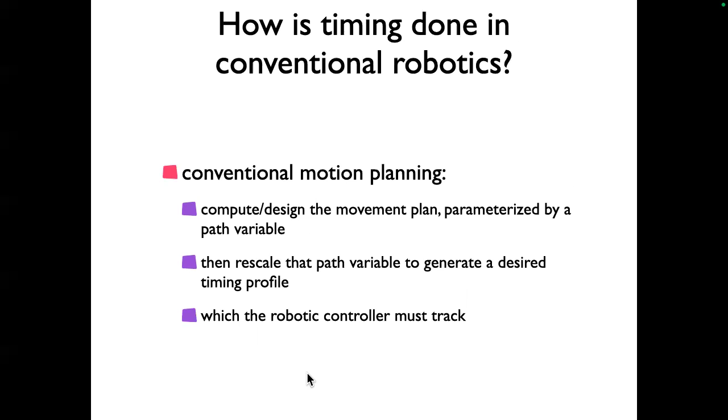And this is in the textbooks I recommended. The pictures are from this book, which I recommend. It's also on the exercise sheet. And there's an online version of this, as you might have noticed. It's chapter 9, if you look that up. So again, I just do that very briefly because it's not really something we go into in depth.

So the first thing you have to decide is in which space you do the planning. Remember, we talked about configuration space. There are mathematically equivalent representations of that. You can use the joint space, for instance, or you can use the end effector space in a non-redundant articulator. Those are equivalent. Sometimes we say articulator, equivalent to manipulator, equivalent to robot arm. The speech articulators are an example of that.

So if you do this different planning, then the kind of interpolations you do when you generate a time course from start to end will look different. For instance, you could have a straight line in joint space, which then leads to a curved path of the hand in space, or you want a straight path of the hand in space, and then it's curved in joint space. And a straight line is easier to interpolate and write down as a function in the planning code, so you might choose which one you do.

Humans actually tend to move their hand on relatively straight paths in 3D. And so it's more, whatever that means, right? But that's what they do, and we'll come back to that.

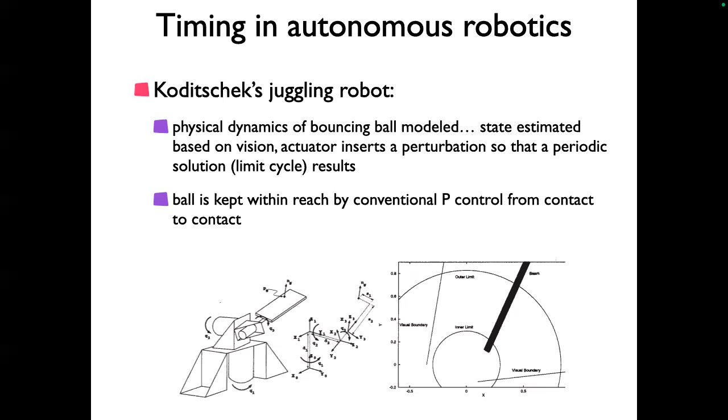The limit cycle is a nonlinear dynamic solution, an attractor solution that's periodic. That wasn't common at all. People just think of harmonic oscillators that end up at a fixed point, being at rest. Quite innovative, and it became famous through the Raibert school. This guy, Marc Raibert, was at MIT. He founded Boston Dynamics and is still running that. He was originally an MIT professor.

He had a famous hopping robot. So it's a robot sort of analogous to the paddle. It's just the robot itself that jumps. The robot had just one leg, a one-legged hopper. It was a passive spring that did the actual interaction, and then you would always insert a bit of momentum so that it jumps up. And again, the control of the robot in the plane would be done by changing the angle at which this leg hits the ground, with a P controller, to keep it in vertical bounds.

And the main thing is to keep that rhythm. Again, you have the model of the robot as a falling object, and that makes a certain trajectory. And now you're writing down the equation of the falling body, but you insert another term in that equation, which makes a limit cycle. And that term is what you're going to actuate. So you make sure that the robot delivers that term to the equation.

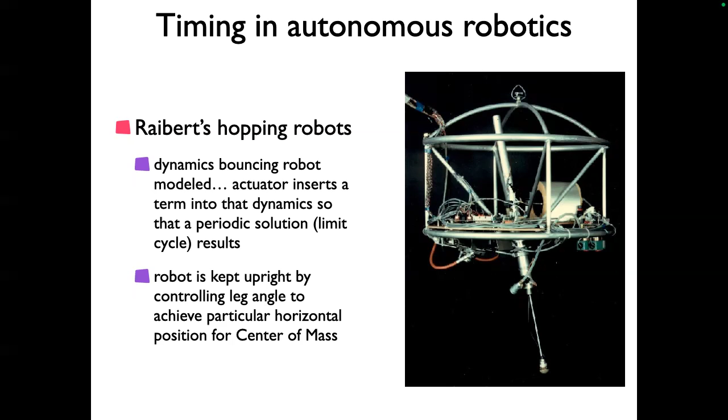It's only approximately true, but because you design it to be a limit cycle, even if you're not exactly on that solution, you're going to be close to that solution. The same kind of idea. Again, you don't have to understand that fully, but maybe you get an intuition for that. And so they have done this.

So Koditschek actually has some general discourse about that. I think I'll skip that because it's a little bit too abstract. It's a very interesting thing where you don't have to think about the details. You can just think about sort of a macro state. But I think that leads a bit too far for this lecture.

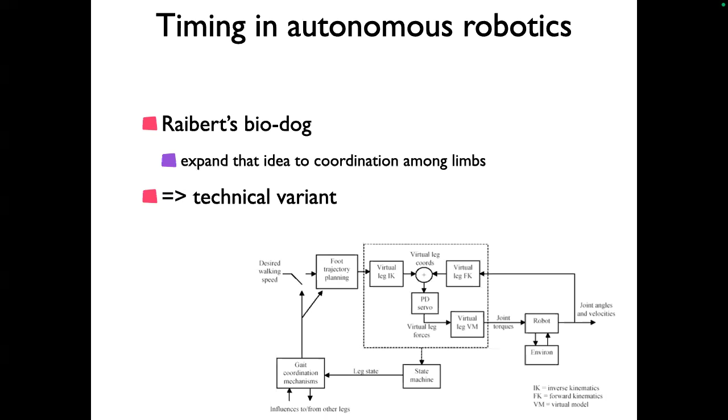I'm just saying here that there is more than just that idea, right? You have to do a lot of things right to get that right. The leg has to sense that now it's engaged and has to insert some momentum to actually hop and so on. And so here I wanted to show you this video.

I hope this works now. I have to move this over here. Oh, we have this. Sorry.

We know these things, right? This is a video from Boston Dynamics. They have all these kinds of robots, and they're much more complex than that. But the core idea of how these individual legs make their motion is a limit cycle, a limit cycle that is just sort of keeping a rhythm.

And it is now reacting—can you imagine the mistreatment of robots. So here, for instance, the legs encounter terrain, and so they don't actually extend as much as planned, and then the limit cycle just adjusts to that, and we'll just try to keep something optimal.

They also coordinate that, making sure that the different oscillators stay on a certain phase, like coupling them. The robot doesn't have a model of the environment, doesn't have a plan—it's just reactive to what happens to the individual legs.

The steering, by the way, is not automatic—it's someone with a joystick directing the robot in different directions. There are many variants of this from the company, but not for that.

Now, for instance, it's like making that periodic motion, and that periodic motion can update every time it is mechanically prevented from actually achieving what it's supposed to achieve. Okay.

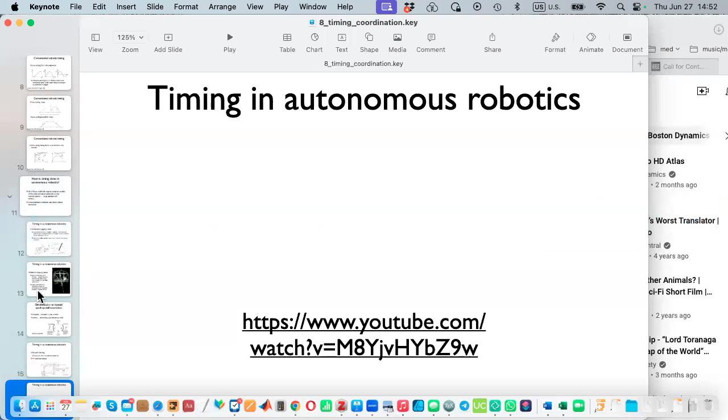There's lots of videos like that on the internet, you can easily look at that. So that's one line of thought here.

To finish that thought: this was all done because in autonomous robotics you don't know everything, so you can't just plan a perfect time course to go to certain places. You have to do it on the fly, solving the problem of a dynamic environment—the environment changing, even perhaps just because your plan wasn't perfect, so the deviation from the plan is like a change in the environment. It wasn't actually necessarily a change; the plan just wasn't perfect. But it also gives you for free the ability to deal with a changing environment.

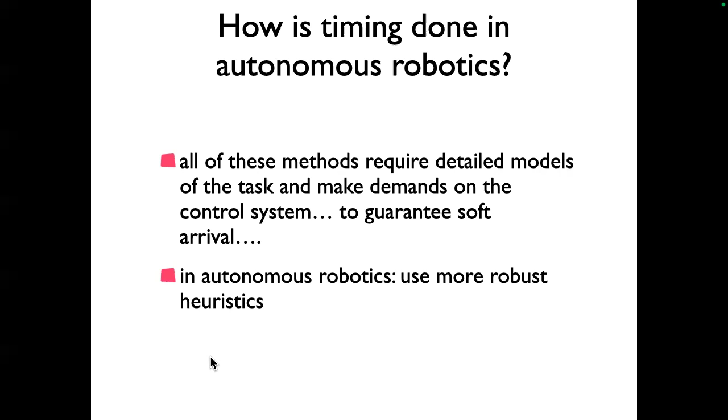So it's much more demanding, but also much more performant. This is not done at all in industrial robotics—they just repeat their movement, and if it's off, it's off. It will destroy a lot of stuff before some observer turns off the robot arm and corrects the error. So it's fundamentally different in these autonomous machines.

Others could lecture a whole course about this, and it's boring in the sense that you have to figure out the details and the different approaches, each with their advantages and disadvantages. But conceptually, it's just that.

So what I instead want to do is throw out a few concepts that can be used to think about such things. These engineers are actually, in part, inspired by or interact with and use concepts like that. And these concepts come from human or animal movement—mostly human movement.

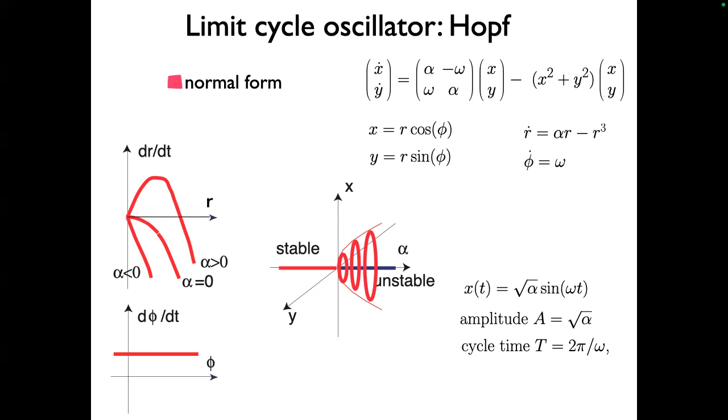They are not harmonic type oscillators - they're what we call relaxation oscillators. That is, there are fixed points that are almost stable; you're going toward the fixed point, but when you get close, you find it's not stable, then you go to another fixed point and so on. I don't want to explain that in detail - there's actually a simulator for that online, but I don't want to go there.

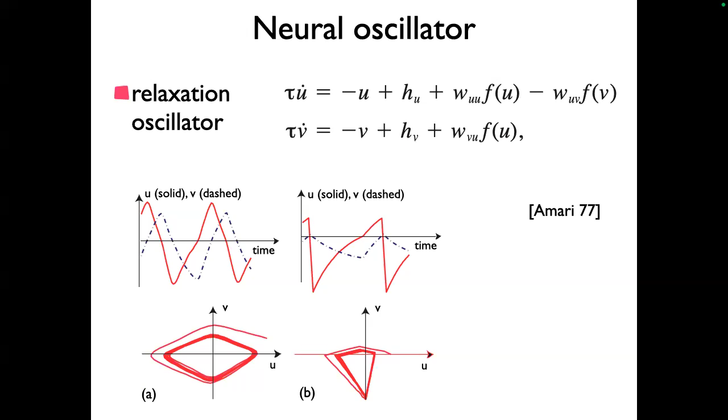So these kinds of models can actually account for some of this observed stuff. For instance, in those models, the variability of the cycle time increases with the cycle time, just naturally, off the bat. In a sense, in any limit cycle there's an unstable direction - it's actually a marginally stable direction where you have Brownian motion, that's along the limit cycle.

So if noise puts you a little further along, you just keep going - you don't go back to the old time, you just keep going further. That noise shifts you along the limit cycle. Imagine if you have a longer, slower movement, you have more opportunity for such perturbations, and that creates this increase in variance. The longer the movement, it's essentially Brownian motion - for those who know that diffusion law, Brownian motion, Einstein, that kind of story.

So that's absolute timing. And these oscillators that autonomous roboticists use are inspired by that idea — you need some oscillator that you're driving the system with. And because it's a stable oscillator, you don't have to precisely plan everything. If you're a little bit off, next cycle you'll be closer.

Now they're also using the idea of coordination, and human movement tends to be coordinated. So locomotion, we're clearly alternating — we're bipedal, so for us you could do hopping or alternation, but there's a real constraint on not falling over. If you're a quadruped it's already a bit more flexible, and there's subtle stuff where dogs will make an extra step with one leg, called relative coordination. Centipedes and so on — it's always been studied.

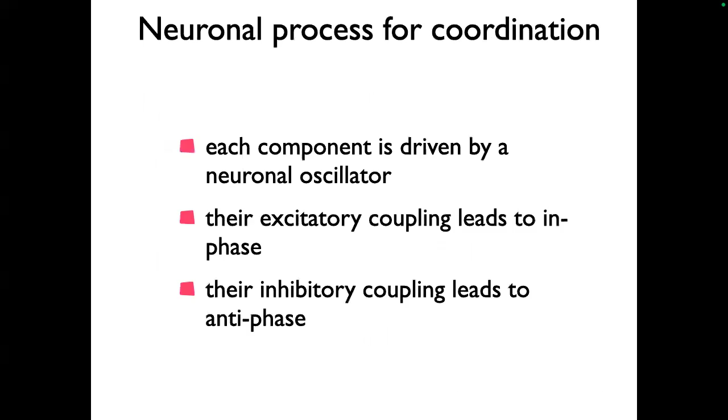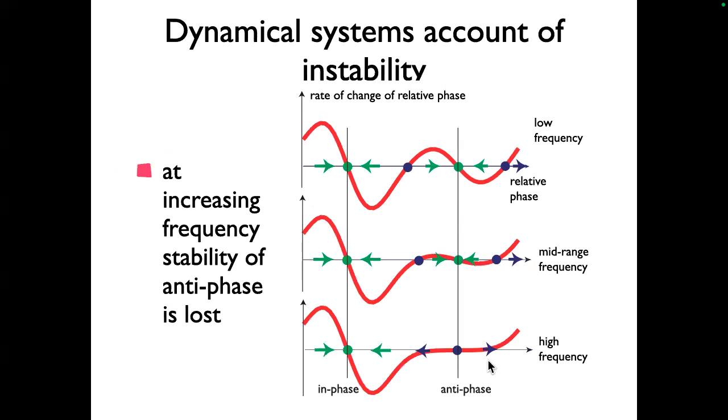So if you do a model, I'll just say that here, a model where there is some attractor at in phase, this is phase, and that will be in phase, that will be antiphase. And if the attractor becomes unstable, so the slope goes to 0 until this becomes a repeller, right? You would be familiar with that kind of bifurcation. Then the stability is predicted to be lost. So the slope becomes flatter, less stable. And you predict that the variance then increases.

This is something we didn't really study. You can get intuition why that's the case. If you have a steep dynamics, you have this amount of noise, then it would shift the dynamics up and down, and the fixed point would be moving within the small range, and that's where you would be driven. If you have a flatter dynamics, you have this same amount of noise, the attractor now moves a lot more. So it's a bit more complicated because also the slope is different, so you may not be moving as fast to the attractor, but overall it works out that way. That's why you're predicting that the variance increases with frequency.

And similar for relaxation time, you're predicting the relaxation time directly is, remember, this exponential minus alpha t, that alpha is 1 over the slope. So these are predicted from these kind of models. So that's why this was very exciting. So that really means that antiphase, it's not a question of not having the neurons to do antiphase. It's a question of they are outside the stable regime. So you won't see it because of that.

So that was actually quite influential, why this paper is still cited sometimes. Because you can say, that means timing, relative timing requires stability properties, now not of a heading direction, but of something like relative phase. And it's coupled oscillators that do that. So if you take oscillators, this is an example of the neural oscillators, and you couple them, which just means that one shows up in the equation of the other. So for instance, here oscillator number 2 shows up in the equation for number 1, and oscillator number 1 in the equation for number 2.

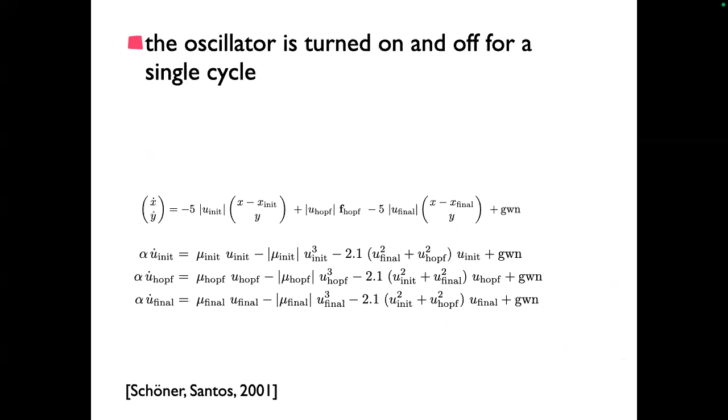So we actually built a demonstration of this in intercepting balls. So we made an oscillator that would be just doing one cycle. It wouldn't do a periodic movement, just one cycle. It's based on taking an oscillator, a Hopf oscillator, and turning it on and off just right, so that it only does one cycle. And then after that cycle, it would go to a fixed point. And by doing that, we can then synchronize it with some sensory information about a ball. It would intercept the ball. And explain all the equations.

So there's an example where there would be a signal that starts the oscillator, and the oscillator moves just on a single cycle, right? It does look like a periodic motion, but it's a single cycle of periodic motion, because when the movement has ended, we're turning off the oscillator. And we were able to show that it can take a ball and even have sensory information about the ball, but it would just make one movement for intercepting the ball and then moving back, and it's stable in some way.

And we actually demonstrated that on a vehicle. So this would be an example of a vehicle that does do that timing. So the vehicle is this thing. It has a cable because it's a little mobile robot, and the cable is so that you can use the offboard computer, and it would be moving to a target, and then we would introduce an obstacle. And what we arranged was that even though the obstacle forces it to go a longer way around, we compensated by going faster so that it would arrive at approximately the same time.

Well, fairly complicated dynamics were achieving that. I mean, so this would be an example of timing, using the timing to control relative time. It's of course a toy example, right? It would be like the basketball, baseball guy who arrives in time even though he has to. Actually, I don't think baseball guys encounter obstacles, but yeah.

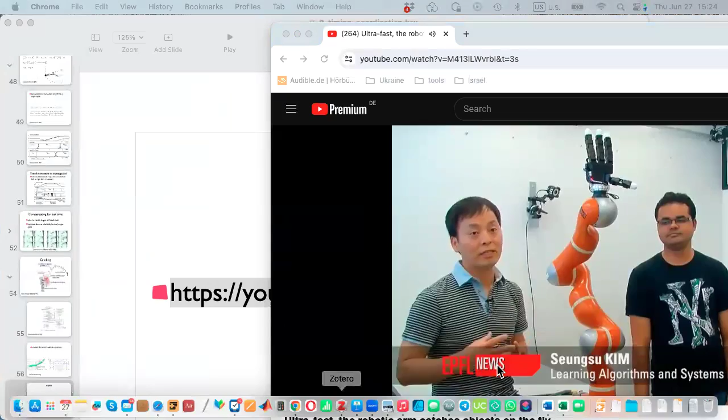We teach a robot how to predict how a moving object moves. After that, we teach a robot where to grasp and how to move each arm. I think the main novelty we bring... We call this programming by demonstration. This robot interacts with human inhabited environments where things can change in a fraction of seconds... you need to have controllers that can adapt.

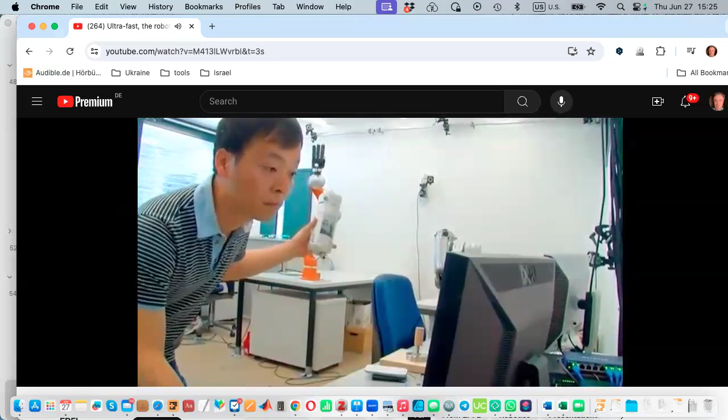Again, they wrote a whole book about it, so it's a little bit more than I can cover in 5 minutes. But the core idea is still that same kind of idea of using an oscillator and coupling it appropriately to sensory information. Okay, almost done.

So this is our version of that, which was about the same time, but much less impressive because the robot wasn't very good. But we just simplified that to just the core problem. So we used a ball here. I'll show you the robot in a moment. So this is what the robot looks like. It's intercepting a ball. And it was also done because the robot was so poor that it couldn't really move fast. It was not easy to control. So we made it slow by making the ball move.

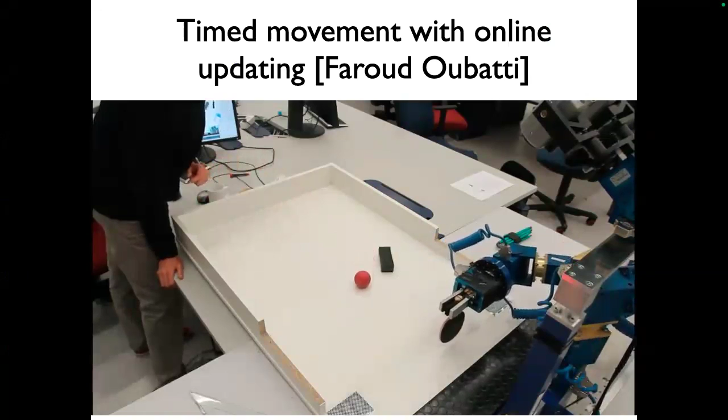So let's first look at what we did there. So we have the ball, and the robot had to intercept it at a certain point with the racket and give it a movement. The movement was sort of one standard movement that would push it up. Again, we couldn't hit it hard because the robot was not easy to control. We couldn't give it a lot of accelerations, so the ball was only mildly pushed up on the slow incline. That made everything slower so that the controller could catch up. And it was literally interesting.

I showed you earlier that inside there was an oscillator, and so we had to do two things. First of all, we used that oscillator to get to the right location, and also on top an oscillator for the hitting. And to get to the right location, meaning just in time. Again, we could have gone there and waited, but we had that idea. And so the oscillator was coupled to information about the ball. We estimated the time to contact from the velocity of the ball. And then we also turned on and off the oscillator by neural equations. So this is what is discussed in the winter semester.

Some of you may know that there are condition of satisfaction and intention nodes, and there's some kind of logic of a sequence of things, like move there and then make this movement and go back and couple, and all of these are eliciting oscillators for different phases of movement. And so the cool thing about that is that it is exploiting these stability properties so that the system can react to perturbation. So for instance, it can react to a perturbation that just requires updating.

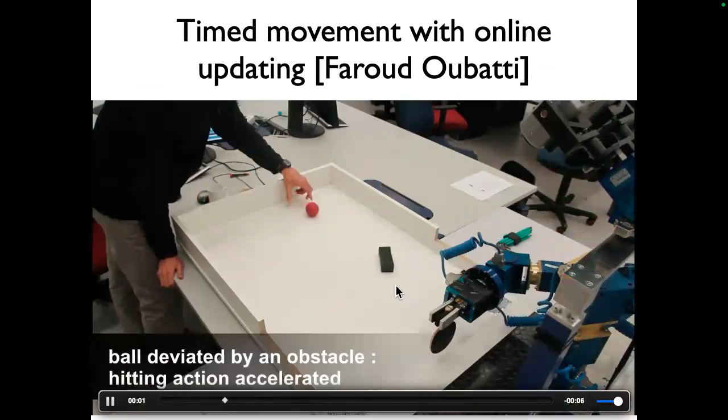And this is a demo. This is the obstacle, and here, see, it's very short here in the robot. See, in the initial phase, it's moving toward a point more here where it's moving to the right, and then it updates. Because originally it's expecting it to hit the baseline here somewhere on the right. It's just a very short time, so we slowed it all down to make that visible.

And this is another aspect of that where, again, this is the baseline, and then we would have the ball hit an obstacle and therefore go away. So it stops assuming that it's coming down, so it aborts the movement. That's this neural dynamics I didn't explain. And then the ball ends up coming back and it starts a new movement. So what the robot does is initially it wants to intercept, and then it decides the ball is not coming, aborts the whole movement, goes back to baseline, and then makes a new movement. Here's the demo. So as the ball comes, it now goes back to baseline and does that.

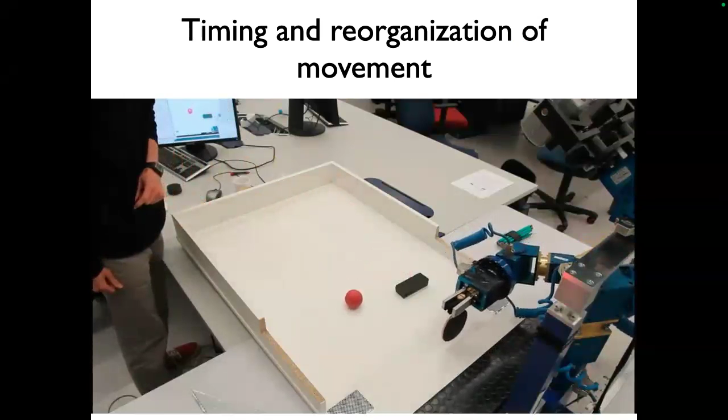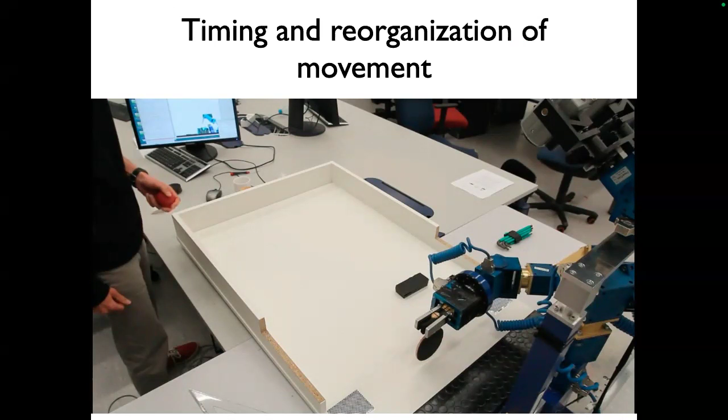So in the demo, it is not that impressive because it's just very small movements, but in terms of the underlying control logic, it is really that thing of having behavioral organization, abandoning different movements, but also tuning the movements always to the input. So it's not a fixed movement that's planned, right? It's an equation that can couple. So that is really the conclusion for timing in autonomous robots, that they do that as stable oscillators, limit cycle oscillators, and their coupling makes timing and relative timing. And you can do that for discrete movements as well. It's really just a limit cycle oscillator that you turn on to initiate the movement and turn off at the end of a single cycle. That's sort of the story.

And that is actually a model that we are also proposing for human movement. We actually have it all done; we just need to publish it, about human movement, avoiding obstacles, reaching for targets, and so on, sequences of such movements. And it's based on neural populations driving the spinal system that has some reflexes as well, to achieve a single movement, but it has these timing properties.

Good. So timing is this just-in-time kind of thing, right? That is the property of timing. That is, timing is control. And so in the nervous system, everything is timed, and there's online updating that I just showed. That is, you can correct your timing to adjust to moving things. You can coordinate across different movements and coordinate with dynamic environments.